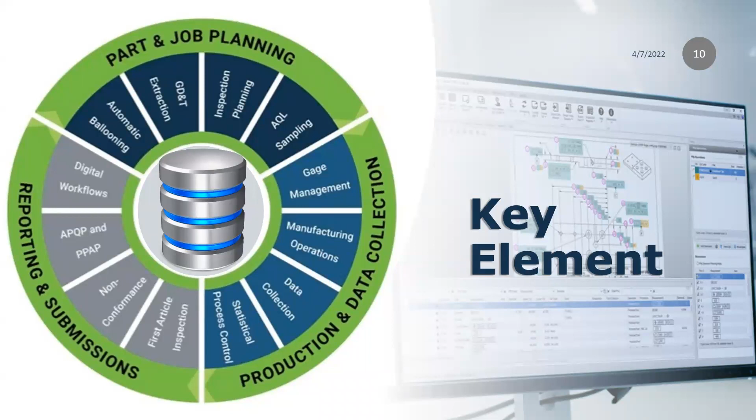But we can never get very far in a presentation without talking about one of our key advantages, and that's the database. The HighQA solution is fully database driven. So whether you're setting up an inspection plan, inputting measurements on the shop floor, or automatically importing your CMM data, it's all in the database and available in real time. You'll be able to track SPC right on the shop floor. Even better, you could be in your office tracking SPC as it's being entered on the shop floor, because it's all in the database. Oh, I also forgot to mention, the database is on your secured network. This is not a cloud-based solution, so the data never leaves your internal network.

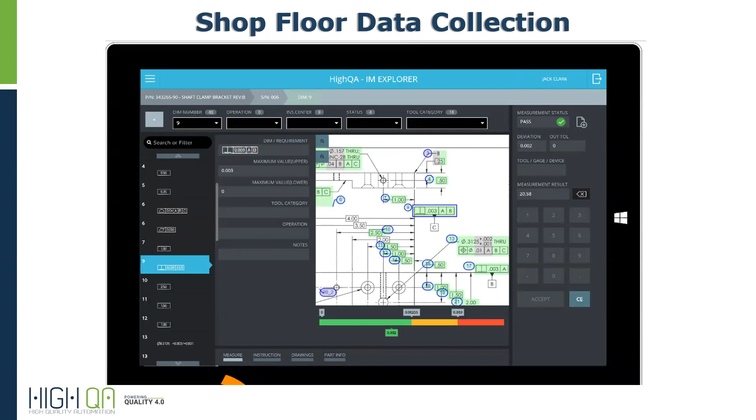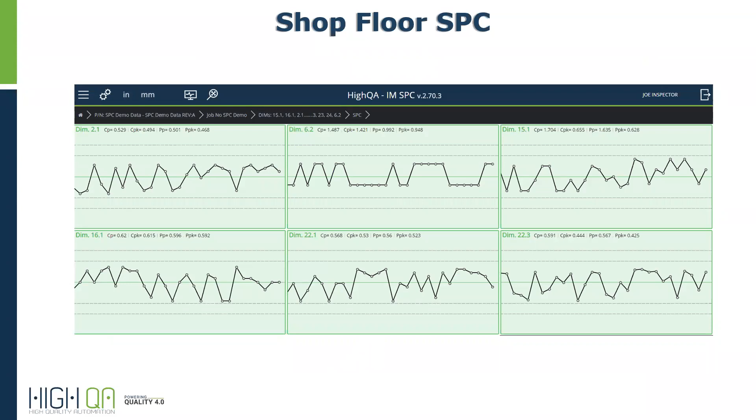So for the rest of our short Spotlight webinar, we're going to open the software, quickly balloon a print, and then build some manufacturing operations. Then we'll get into the shop floor data collection tool, where we'll show you how you can enter data from the shop floor directly into the database. We'll also show how that can automatically populate the database so SPC can be tracked on the shop floor in real time. We'll also discuss how this same exact information can be accessed from any workstation that has access to the centralized database.

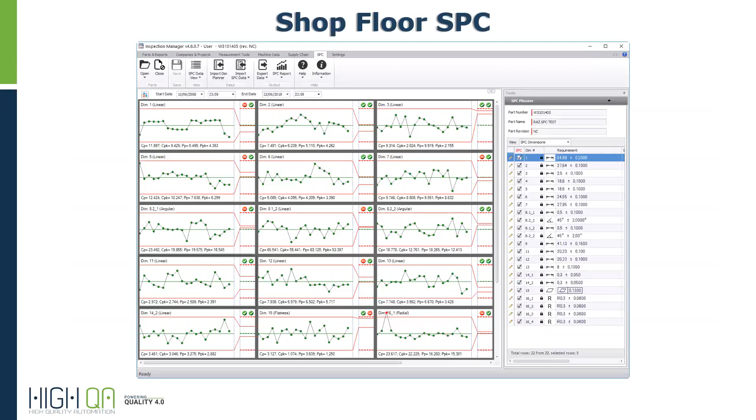Now, this might sound like a lot to get through, but you'll be pleasantly surprised, because everything I just mentioned is integrated into the same software—we can perform these tasks with a simple click of a mouse. This is actually probably going to run under time because everything can be done so effectively and efficiently. Okay, enough talking. Let's jump into the software and show how easy shop floor data collection and SPC can be.

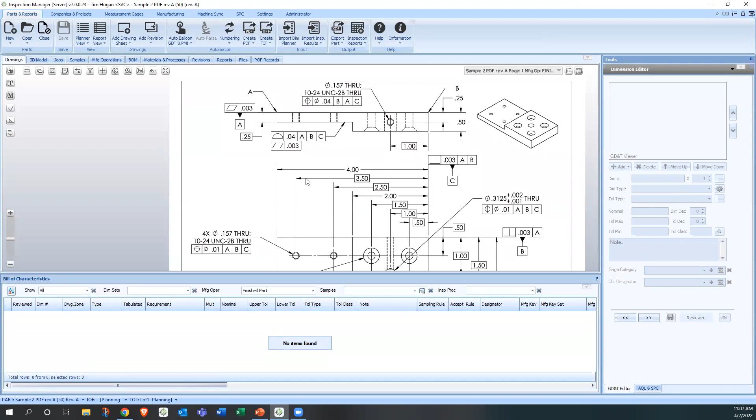So here we have Inspection Manager, and everything starts from Inspection Manager, usually with a 2D print or a 3D model with embedded GD&T, sometimes called PMI data or MBD, standing for model-based definition. But we're simply going to start from a two-dimensional PDF drawing. We can use any type of pictorial-based drawing, whether it's a PDF, TIFF, JPEG, anything of that nature.

So as we get going here, this is just a simple PDF. We use this because it has a good representation of many things: multiple place dimensions, GD&T, basic dimensions, regular dimensions. It just gives you a good representation of everything.

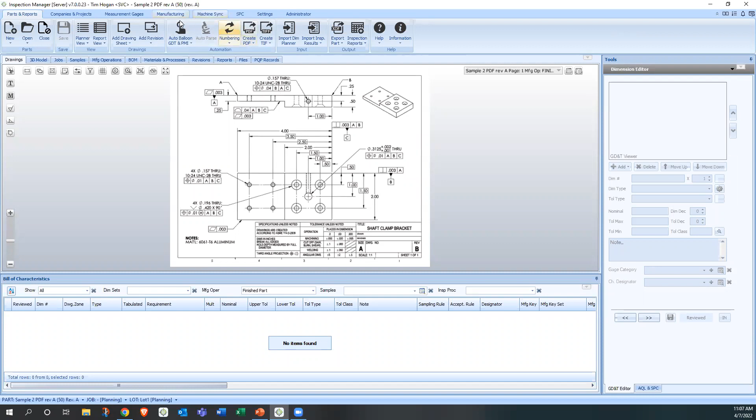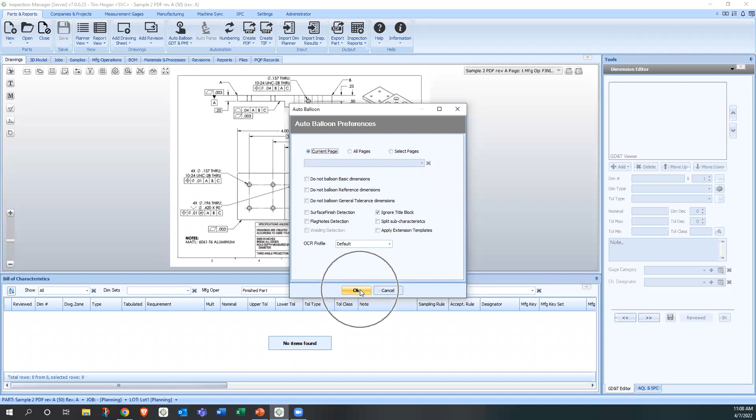So when you open it, just like we did here, we simply come up here to Auto Balloon, single click on Auto Balloon, and then it gives us a couple options. If there's multiple pages available, you can do all of them at once. Actually yesterday I did a 4-page, 251 balloon dimension drawing, and it took less than 3 minutes to complete, so that was pretty quick. But you can turn off basic, turn off reference, different options here. In this case, we're just simply going to click OK.

And now the OCR takes over. This is our proprietary OCR, optical character recognition, and we designed it to look specifically for dimensions and for GD&T. As you can see, that took about 11 seconds or so, and the drawing is completely ballooned. All of the characteristics have been identified uniquely.

But more importantly, if we look down here in what we call the bill of characteristics, all of the information from the print has already been extracted and is now in the database. This is part of the real-time database we've been talking about so far, from the drawing zone to what the requirement actually is—nominal information, the tolerances have already been extracted.

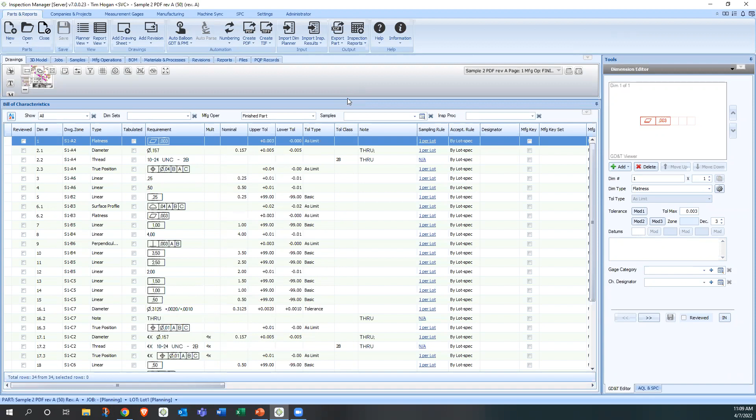If there's a tolerance on the print, for example, this is a plus tolerance, it's noted on the print. And then if it isn't, it comes off of a tolerance chart. So we can use either one. If it is on the print, it works as it should. So from there, all the information's already extracted.

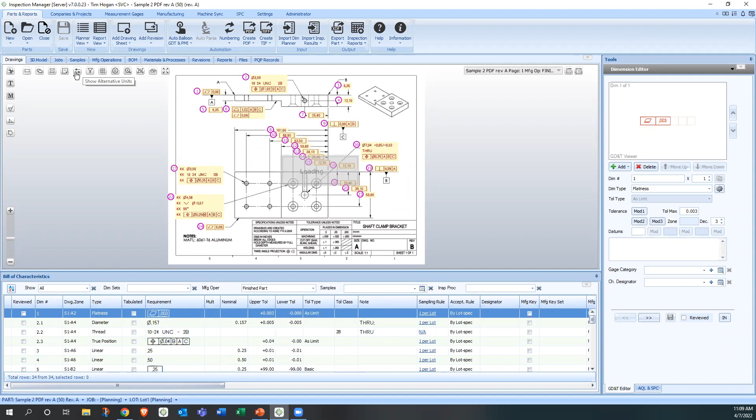Now we're going to skip over, for time's sake, a lot of the bells and whistles we'd normally run through. For example, we can show alternate units, toggling back and forth between inch and metric right on the print. We have a whiteout function where it whites everything out so you can easily see if it happened to miss anything—some neat creature comforts in there. We can also extract title block text, using our OCR to grab information off the title block and have it automatically populate the database entry, what we call the part record. So we'll skip over a lot of those things.

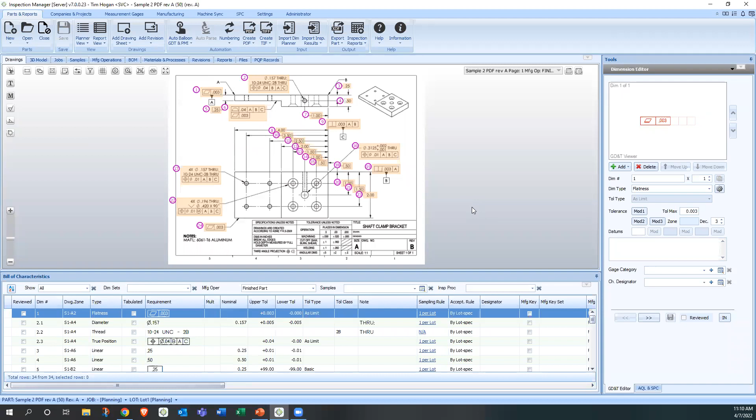However, one thing we don't want to skip over is a key element here. If I just select this dimension, for example, a couple items we can do right inside the software—all included—is what we call define gage category and characteristic designator. Now we bring this up because this is all about helping the downstream effect. When we get into the shop floor data side, this is going to help streamline that process, and you'll see it as we get going here. Let me explain what I mean.

So if I look at this and see this 2-inch dimension here, for example, I can select gage category and say, how do I want to measure this later? Do I want to measure it on a CMM? Do I want to measure it with some type of gauge? Let's say I want to measure it with a blade micrometer, for example—I know it's not right, but bear with me. This is just the category, keep in mind, not the specific gauge—serial number, gauge number, anything else. This is just the category: hey, use a caliper, use a micrometer, use something.

What that'll do downstream, kind of foreshadowing for later, is it will limit the list that comes up for the shop floor personnel who's going to enter that data. So they only see a select number. In this case, they would only see blade micrometers in that list instead of a list of the entire gauges. We'll get into that in a minute. Just wanted to foreshadow that a little bit.

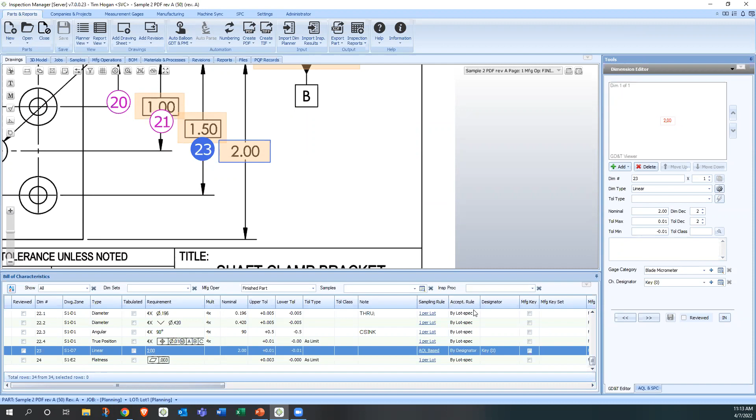Maybe you'd have a key characteristic 1, a key characteristic 2, and you'd have different sampling plans for those different characteristics or designators. Certainly can do that.

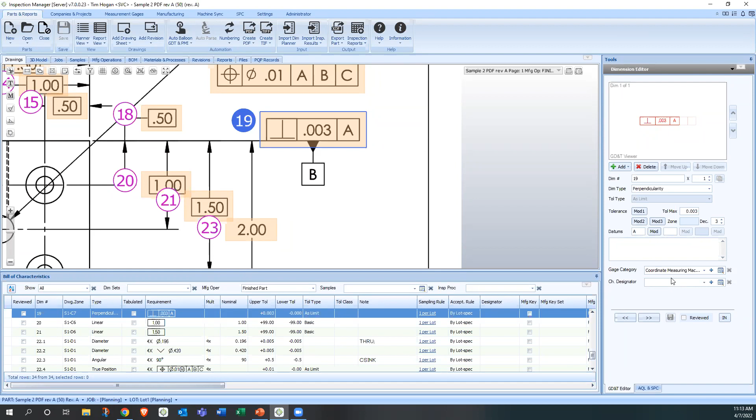Let me give you another example of some of the rules we can do. If I select this, I have a rule in the system that says, if it's a perpendicularity, automatically make my gage category a coordinate measuring machine. So if I just select my perpendicularity here, I can look over here and see that my category already says coordinate measuring machine. I haven't changed that at all. And that happened in the first 11 seconds that it took to balloon the print. It ballooned it, understood its perpendicularity, and then automatically assigned the gage category.

Now, we talk about that because as far as gauges go, we have a full gauge management system right in the software. It's not an add-on, it's not additional, it's part of the core software package.

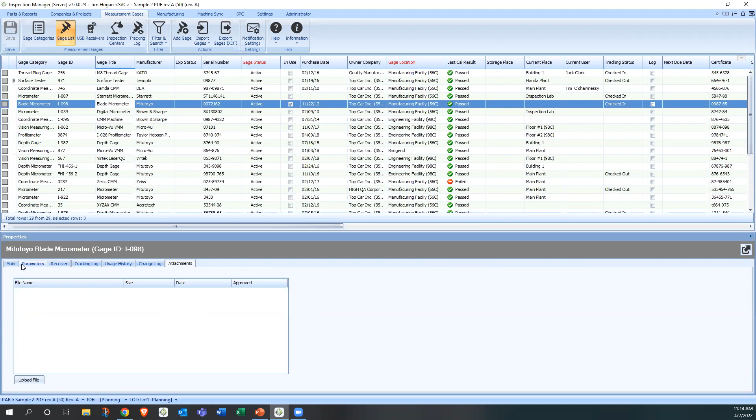What a lot of our customers do is in the attachment section right here, they'll upload like the calibration cert here. So now not only do you have it notated here, but it also have documentation to back up. And now that it's in the database, it's always logged and tracked with that gauge.

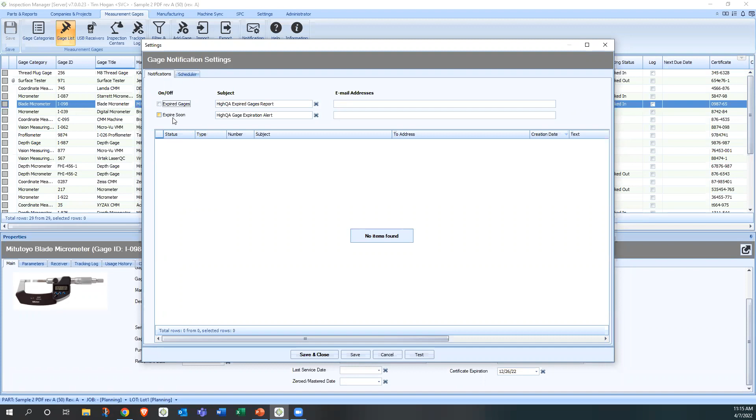So there are quite a few different, oh, by the way, before I hit that, also wanted to note that we do have notification settings set up to where, hey, if this gauge is expired or expiring soon, we can set up alerts. And that expiring soon maybe like 30 days, 45 days, something like that. Before it comes due for calibration, hey, make sure we let someone know that it's coming due. And this can be internal or external if you happen to have like a third party helping you out with calibration.

So with that, we can also import all of your existing lists too. So don't think that you need to import all of this data manually or enter it all manually.

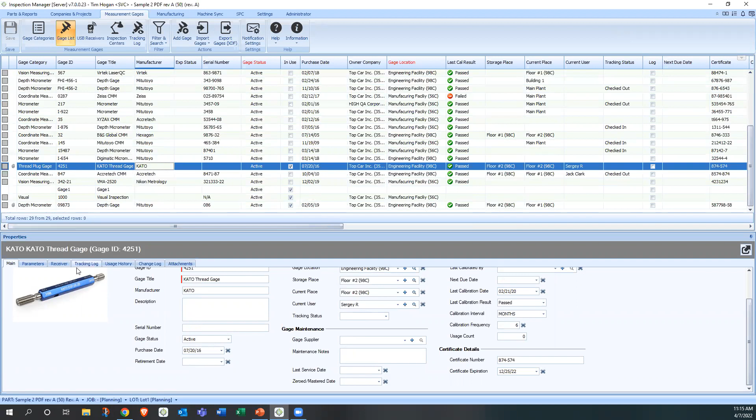But one of the things that we do, and you'll see how this is all tied together in just a minute when we get into the shop floor side. But if I select this thread plug gauge, we have a little tab down here called usage history. And if I click on that, what you see here is every single dimension that that gauge ever checked.

Because we're tracking the gauge in the database, we're going to be tracking the actual information that's being entered in the database. And we have the engineering information, right? The requirement in the database. So now that we have all three of those, we have full usage history right down to this lot number, the serial number, the dimension number of the part itself.

If we scroll over to the side, we can see who measured it, the date and the timestamp. We can even tie it to a specific machine, or if it was tied to a non-conformance report, and obviously a good or bad check. So we have all of that information right in the database itself.

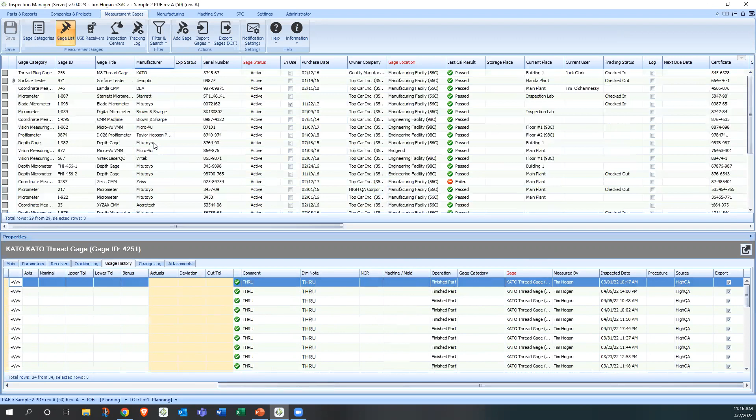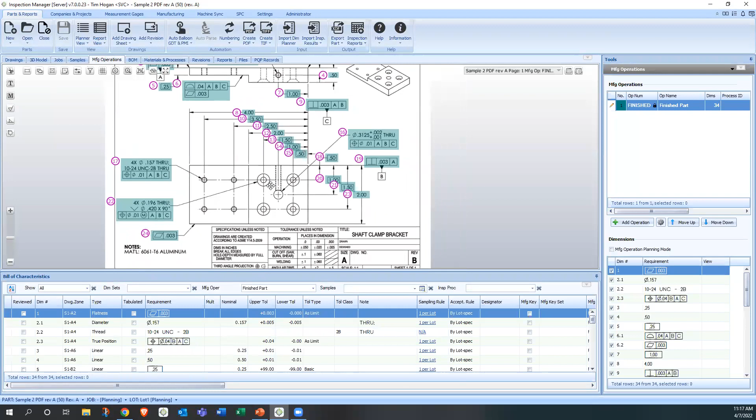Now that we have that information, we're going to get into the manufacturing operations. We have this tab called manufacturing operations. Because when we manufacture this part, we're not just going to chuck it in a mill and it pops out a part. Sometimes if you run a Swiss lathe it would do that, but in this case we're going to run this through operations - maybe drill it in one op, rough it in another, and finish it. So let's say we're going to rough this part out, and we'll select some overall dimensions that would be affected by the roughing operation.

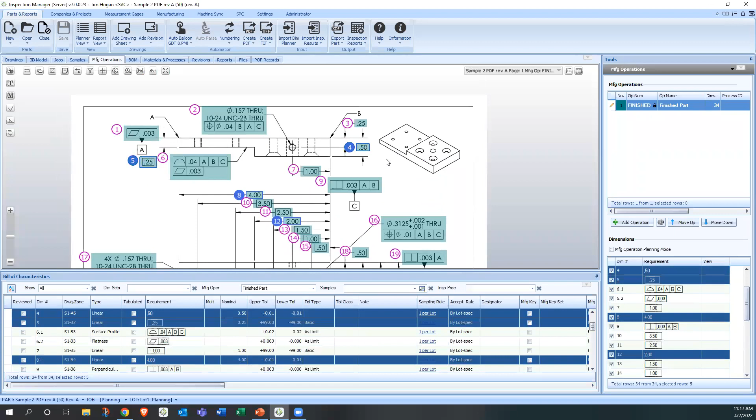If I select those and come over here to add operation, we can see multiple dimensions that are now affected by that operation. We can come over here and change this to whatever we want - I could call this a roughing op. We can tie it to a specific work cell, machine, or specific process.

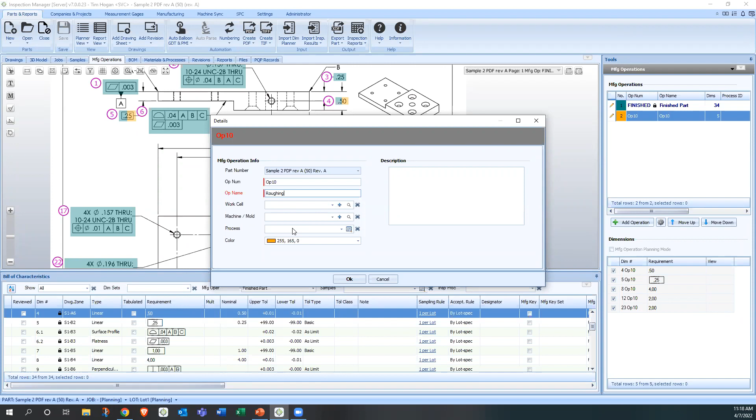Now, if we just assign it to a process, we won't get into this today, but we can actually automatically generate all of our PQP documentation - the control plans, the process flow diagrams, the PFMEAs. All of that documentation can be automatically generated if we notate what process we're using.

But let's just say, okay, now down in our bill of characteristics we have manufacturing operations pulled down, and I can say I just want to look at my roughing operation right now. Now I have an in-process print just for my Op10. I know a lot of manufacturing engineers create a print for every operation - well, you can do that right inside the software here. You can even take this, all the information for the Op10, we only have the Op10 dimensions here.

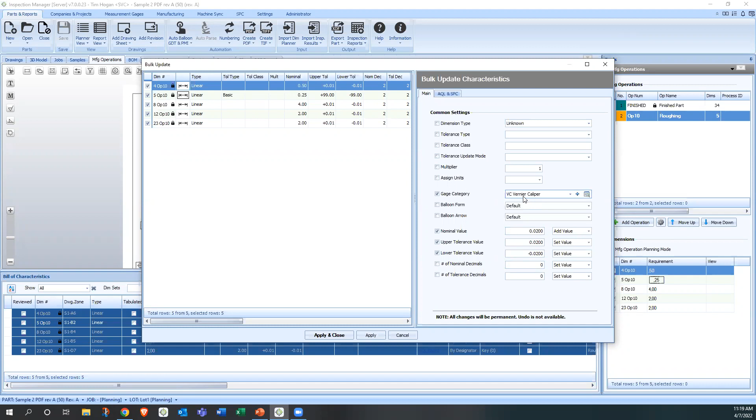And you can update the nominal value. Let's say you want to add 20 thousandths - you can add, subtract, go by percentage, however you want to do it. You can change the nominal, like you're leaving material to finish later, for example. And you can even set this to where maybe you want to open up the tolerance a little bit for the roughing operation, and assign a gauge category - I want to use my vernier caliper to measure this. And I hit apply and close.

Now if I look at my bill of characteristics, I can see that all of my nominals have been adjusted by that 20 thousandths, and all of my tolerances, my plus or minus tolerances, are set to plus or minus 20 thousandths, even my basic dimension. So now I can go into my shop floor data system and be able to see this Op10.

Okay, so let's do that right now. Let's get into the shop floor side of it. So on the shop floor side, we have Explorer, Express, and SPC. I can just show you what they look like here. We have Explorer - Explorer and Express is a way to enter the data into the database.

Now, when we do that, Explorer - think of it this way - they're kind of the same thing, but they have limited visibility. Explorer is going to show every job available, and then it'll be up to the inspector or machinist out on the floor to select the appropriate job and number. What Express does is it limits what the person out on the floor can see - they will only be able to see jobs that are assigned specifically to them, not everything. And then SPC we're going to get into as well here in just a few minutes.

So let's go back into Explorer. We're going to log in here. Please note, if you have a badge system at your place, you can just scan a badge and log right in. Now, why are we logging in?

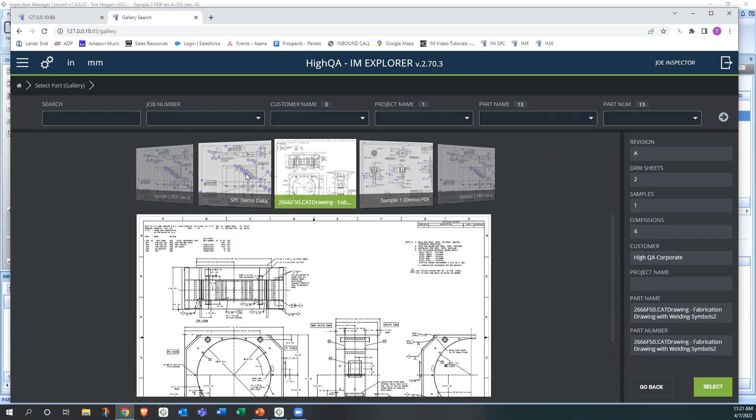But when we talk about entering data into the system, we can click on Gallery View. As I mentioned, it shows every job available for the people on the floor, and they could just thumb through here and see the different prints and pick out the one they're doing. Or they can select by job number. Let's say they're doing order 66, for example, and it's like, oh, here's my print for this specific order.

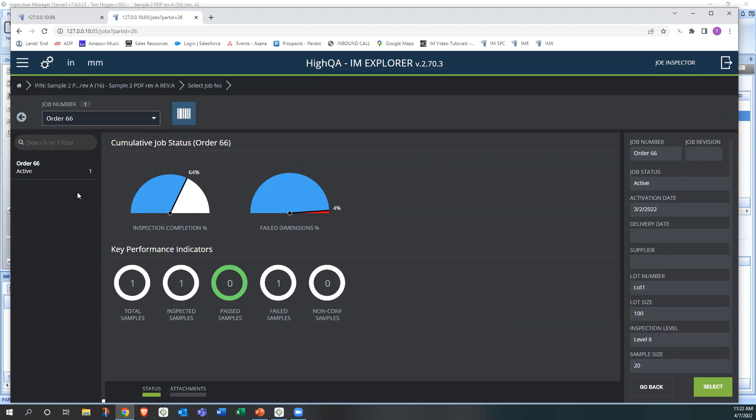There's a nice dashboard here where you can come in to see the completion of the project itself. Then when we go into serial number 1, I have my manufacturing operations up here, and I can select my roughing operation, for example. Now that I have information here, let me get the data out real quick so I can show you what it looks like.

Now it's going to select this dimension and the overall look of this. Again, it's more simplistic, right? It's meant to be on a tablet, some type of touch screen, so they can enter the information in over on the side. Now that we have a dimension selected here, we see the bottom, and there's a nice little scroll screen to let you know what the max and min is.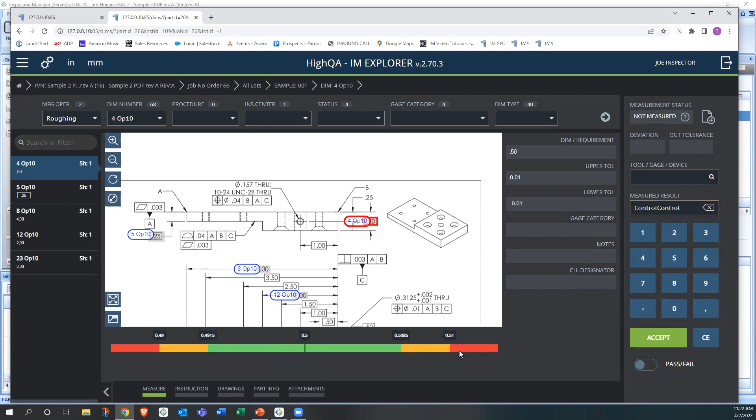You can even expand this, and this is dynamic. You can move it around, you can zoom in, you can zoom out. It's very user-friendly for the operators out on the floor to be able to use.

This is blinking right now, if you can tell, because it's listening. Actually, it's listening for any type of input device. If you have a wireless gauge, a Bluetooth gauge, an RS-232 out gauge, it would input that data automatically.

But we talked before about gauges and usage history, and this is where the category would come into play. If I would have had this selected, only this would have come up. So if I would have had this selected in our planning phase, this would have only come up. This is how it streamlines the downstream effect.

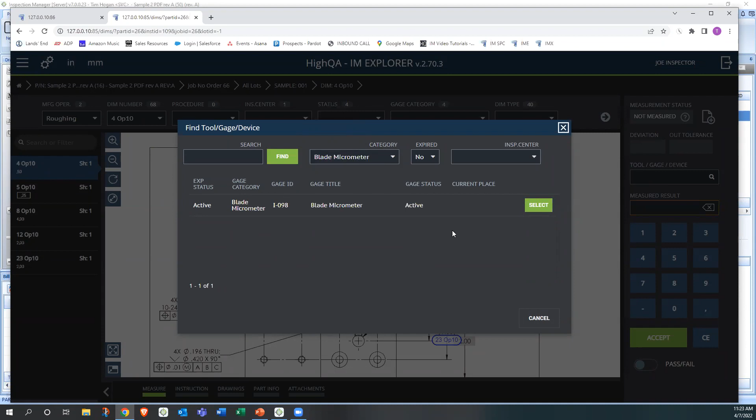So if we select this, for example, now I've logged in. I know the dimension I'm measuring, I know the lot, I know the serial number. All that information is captured right up here. It keeps showing control because I'm hitting control on my keyboard, that's why I get the circle. That's why it's listening for that input device.

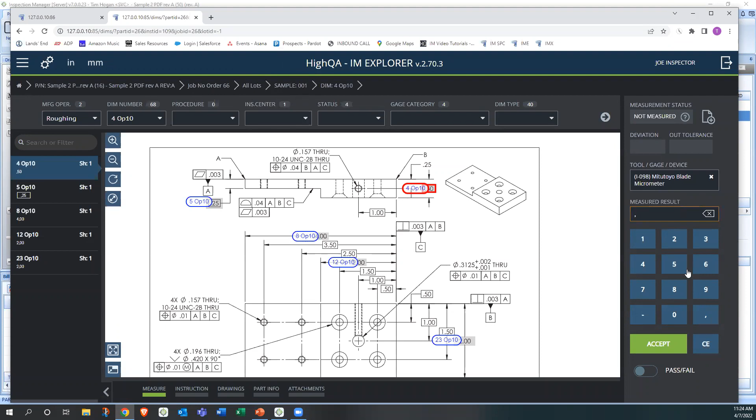If I enter information in right here and hit accept, we can see it's live, right? It turns green and jumps to the next one. I can even change right on the floor if it's a pass or fail, maybe if it's a thread or something. So I can hit accept, that again turns green, goes to the next one.

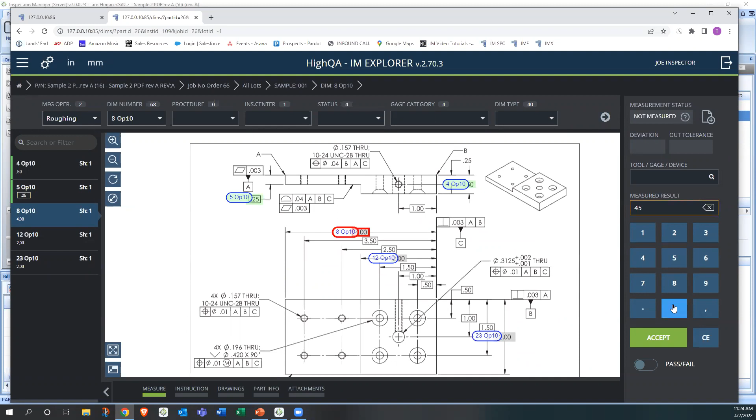Now if I enter in false data or a bad number, it automatically pops up and says, wait a minute, this is bad, would you like to measure it again? But if it really is bad, we can say keep failed, and it automatically pops up with a non-conformance record that we can enter right here, right on the floor.

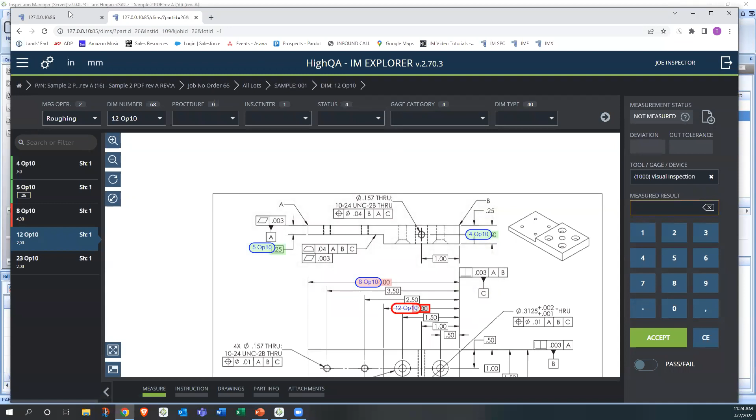But let's talk about SPC, because that's what this is all about. So similarly, this would be where you could enter the information in right on the shop floor. Additionally, we have the shop floor SPC. Now on the shop floor SPC side, we have the same type of look, right?

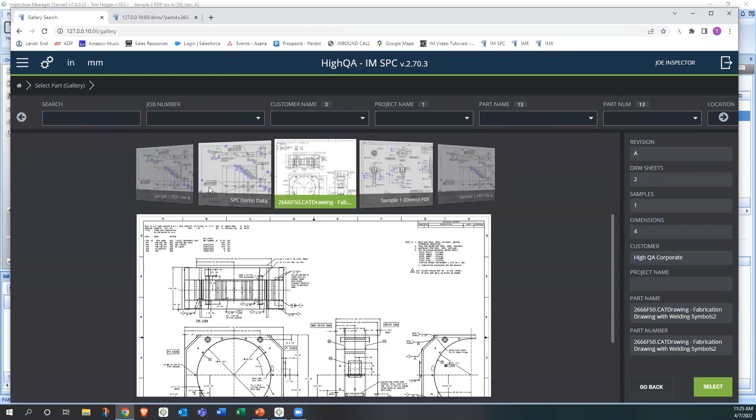Same type of menu system. We can go into the same exact gallery search. However, this time we'll come down to SPC demo, because it has 30 pieces of data in here.

So we can see right here, 30 pieces. Same type of dashboard. But as we come in here, we can also see we have multiple operations. Wanted to point that out.

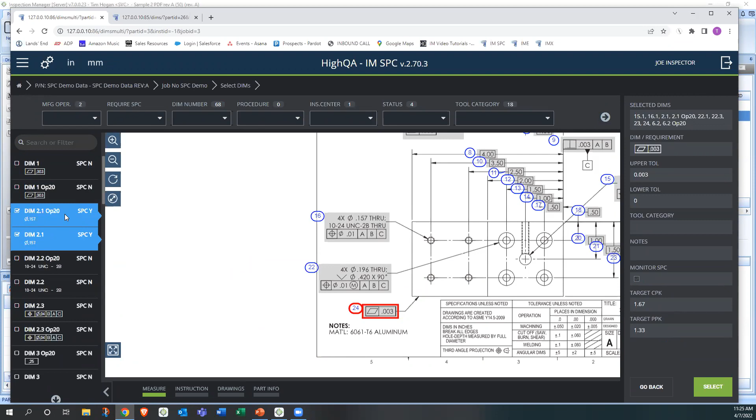And we don't have data for Op 20 right now, but if we did, we could specify the specific operation that would have the data. So if Fred, let's call him, is out on the floor running Op 20, we can just show the SPC for Op 20 for this part, right here up in the manufacturing operation.

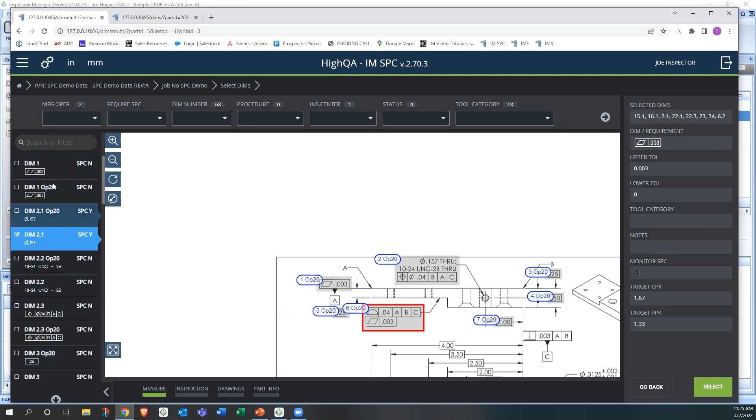But here it's a very similar look. Here's all of the dimensional information off to the left. And then on the right of that, you can see SPC yes, SPC no. You just simply select or deselect it, and it'll ask, do I want to track SPC on this or not? When we hit select, it'll go right into our run charts on the floor.

What a lot of our customers do who use this is keep this chart up on the floor on some type of monitor, maybe a large screen TV or something, so that way they can see this ongoing. All of these unique points here are the run chart and the individual information as it's being entered.

We can look down at the bottom here. Here's our SPC charts. We also have drawings and part information. If I click on drawings, we also have a depiction of the drawing itself.

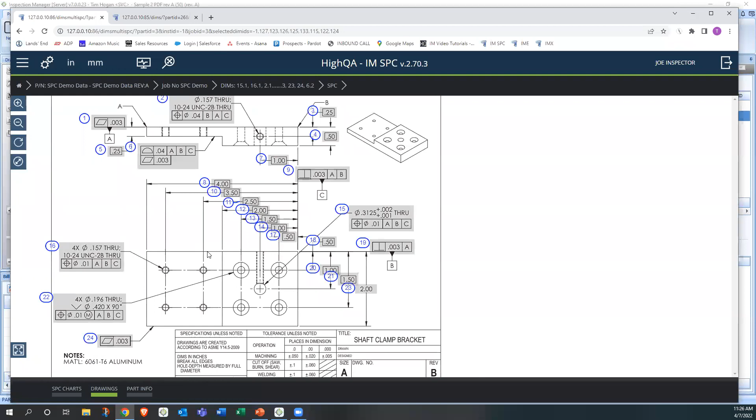And this is dynamic too. We can move this around, zoom in, zoom out, so they can see which dimensions may be bad or going out of control or what have you.

We also have the part information right down here at the bottom. Has all the customer, part name, part number, drawing sheets, all of the information, the job number, the title, when it was put in. We have all of that information captured right in there.

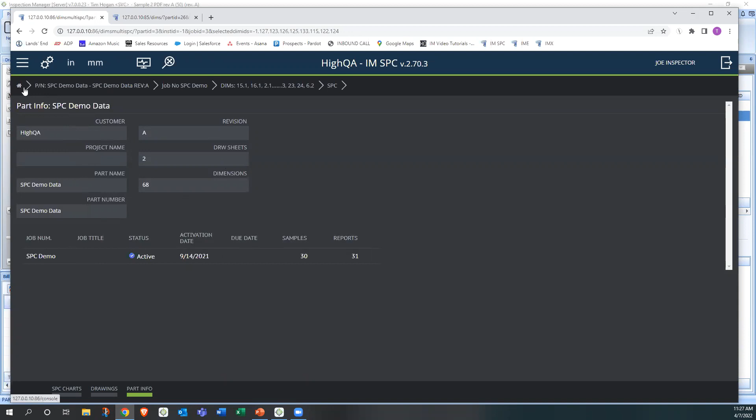We can also go into each individual and see the capability information right here. Here's the CP, CPK, PP, PPK.

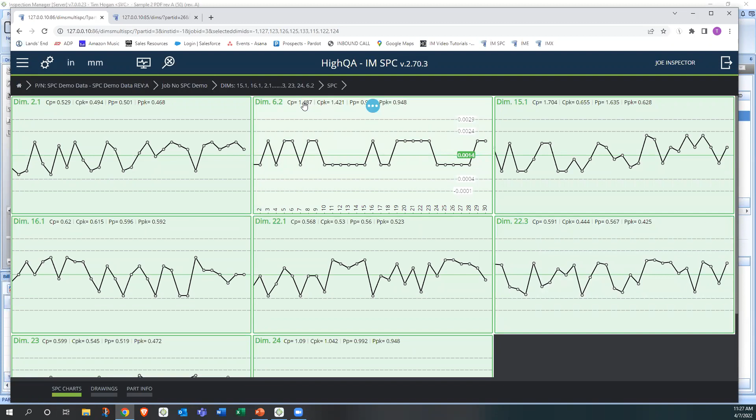But if we click on this button right here, we can also go into it and see how it relates to the calculated control limits, where it's looking for the spec limits. We also have notification set up so that if it's out of spec, please notify these people.

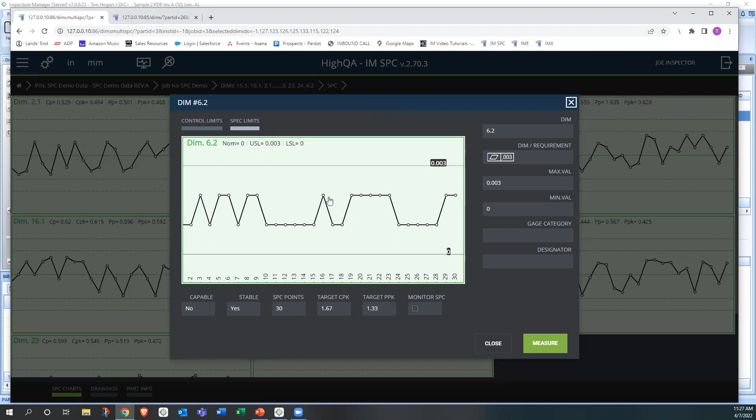We even have a measure button right here to where they can enter measurement information right on the shop floor. They could enter it in right here, see real time what the dimension is doing, how the chart is reacting, what the recalculated CP/CPK is.

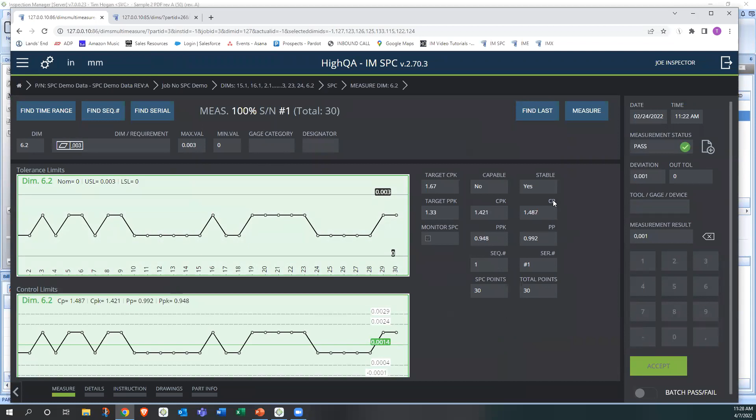It always grabs the last 30. It's a variable, but by default it's set up to always look at the last 30 measurements and calculate it that way, but you can change that or change the subgroup value, what have you.

But this information is to note, if we go back into Inspection Manager and go into the same part record, we can come up here to SPC. We have the same exact information available in Inspection Manager.

So if I'm an inspector, or maybe a quality engineer or quality manager, and I get a notification if something is entered out on the floor and it's maybe an out of spec condition, or in a future version we're going to have an out of control condition, it can be a notification as well. I could get a notification of an out of spec condition.

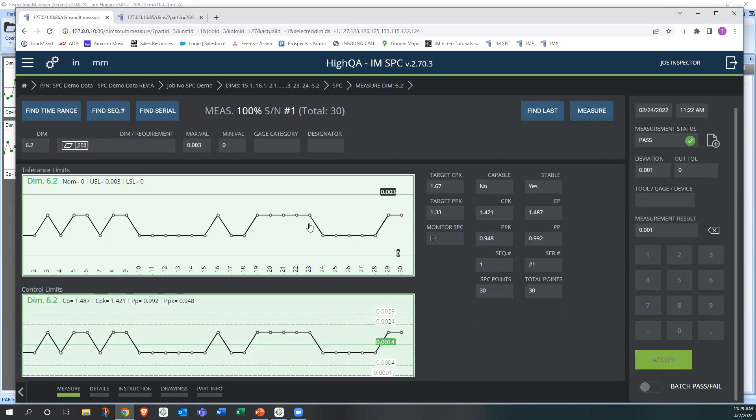They could enter in a non-conformance report. I could log in from my desk and see exactly where it went out, what feature it is, what dimension, what lot, what job, what part, what serial number. We have all of that information available to you. And again, it's synchronized because it's pulling from the same exact database.

We also have notifications set up for a multitude of things. If it has a non-conformance, we can notify from a non-conformance report. A person can log in. You could be a quality engineer working from home that day, log in by VPN or something, and be able to access this data right at your facility or wherever you are currently.

So that's pretty much it for the SPC side of it. I will turn it back over to Lisa and see if we have any questions.

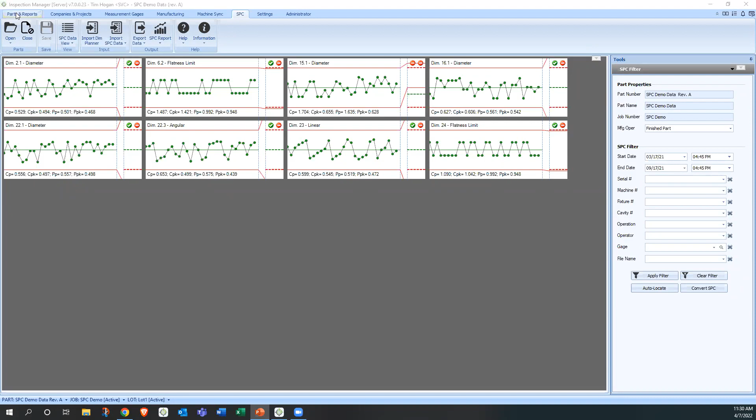So the neat thing about being a database-driven application is that as we're entering data in, whether it's from a CMM or on the shop floor, let's come back over here to parts and reports. I can show you what it looks like. Every time we measure data, it's going to come in as an additional part right here in the sample section. We'll always grab the last 30 from a calculation standpoint, but as long as you're using Inspection Manager and adding this data in over time, even if hypothetically you've been measuring parts for a year and then decide you want to evolve your business and start tracking SPC, you could buy the SPC module and then have all of the historical data tracked.

What do I mean by that? Maybe you're running along and you notice, hey, we don't seem to be in control anymore. Our CP value is running a little low. And you could come to the conclusion that, well, it didn't used to. How did we run a year ago? You could actually stop and recalculate by selecting different numbers right here as to how you want that calculated. So you can do a comparison of now to maybe a year ago or six months ago or whatever. You can always use historical data for your calculations as well.

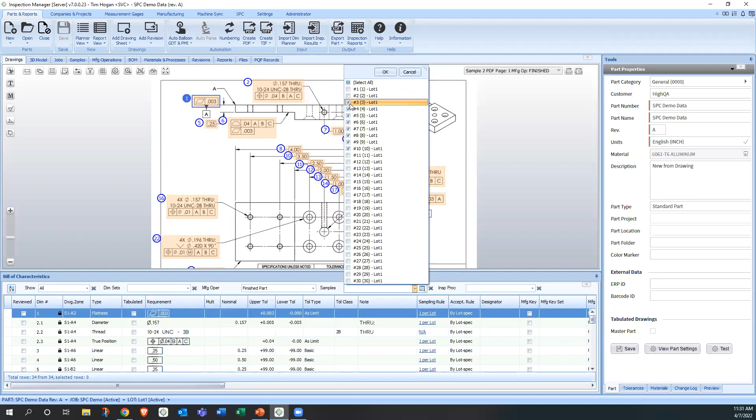It's a good question. Okay, great. Here's another question. It says, how do you identify find numbers? I'm not sure what you mean by a find number.

Okay, whoever asked the question, if you want to clarify, feel free to add additional information there. Here's another question. It says, in my office, we are using LX AS400 right now. I want to know how we will work with that.

LX AS400. I believe what you mean is the data is going into your LX system as opposed to HighQA. We could, if there's an export capability from there, import it into Inspection Manager, or we could do a couple different things. We could populate it into Inspection Manager and then push that data up to LX, so we're sharing information bidirectionally. Or you could even switch over and use the HighQA version of it to be able to track SPC and acquire data that way. Hope I'm answering that question correctly for you.

Okay, perfect. Yes, the person said yes, so excellent. Here's another question. If I already have Inspection Manager, can this be added to it? Oh, great question. Yeah, absolutely. If you're running Inspection Manager, this is an add-on module, if you will, and you can always add it on. A neat thing for our current customers, most of our new customers utilize the subscription format, so it's prorated. You're only going to pay for what you use. But yes, it can be added to any version. Absolutely. Good question.